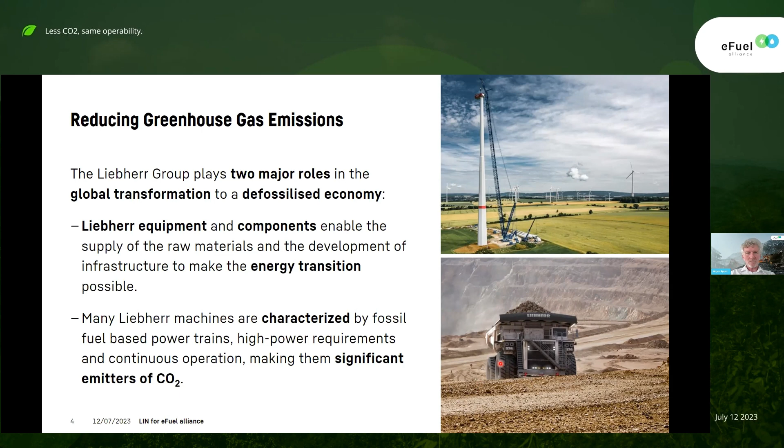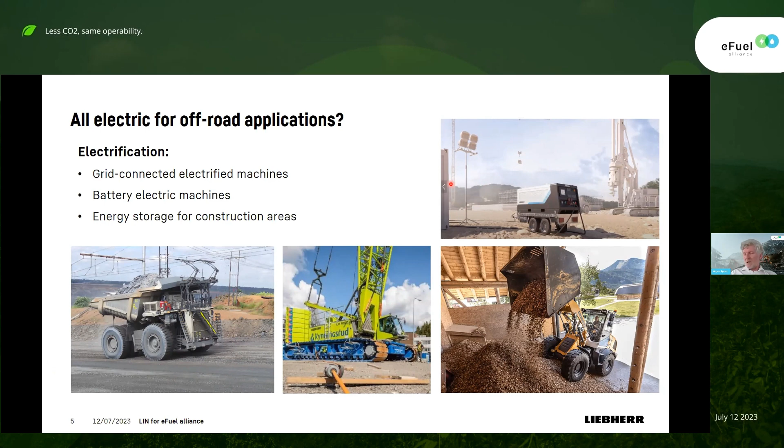And the motto today is all electric for off-road applications. So talking about electrification, it could be grid-connected machines like this lattice boom crane. We're talking about battery electric machines, this small wheel loader down here, grid connection plus battery, like this big trolley truck over here, or for instance, some kind of energy storage for construction areas. All this exists already. So is electric for off-road applications possible and thinkable? Yes, it is, and it is available already now.

What do we see? Strong trends towards zero emission job sites. So tailpipe emissions should be zero. That's a clear trend. We know this from urban areas, not only in Europe, driven from a lot of countries, not only Scandinavia, but also Dutch cities strongly recommend not having any tailpipe emissions. And this is, of course, a big headache because this reduces the amount of possible technical solutions.

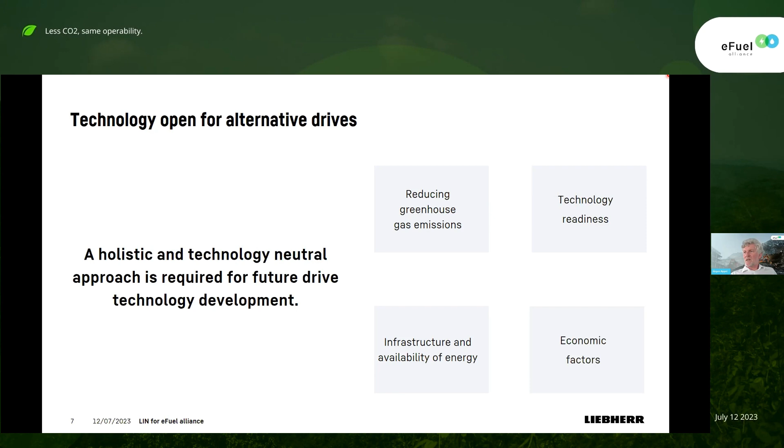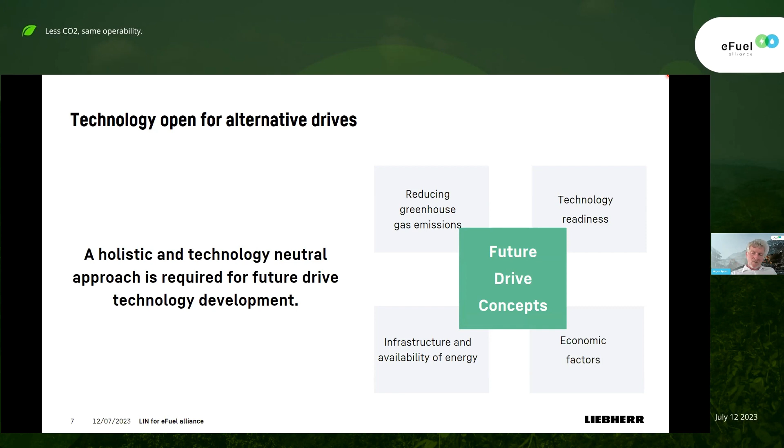And the last one is, of course, an economic factor. The customers do not make their business by having fun, but they want to earn money, and at least the overall technologies that we are bringing into the market must have at least the possibility for our customers to earn money with this. And if all these four factors come together, then we say that this is maybe a future drive concept. And I will go quickly through all these four pillars.

Reducing greenhouse gas emissions, Theresa Steinfort will talk to you later, is the first pillar, which means we have done this study to evaluate, really from a life cycle perspective, which drive lines for certain kinds of equipment have at the end, from cradle to grave, the lowest emissions. This is done by the study. I will not explain this later because this will be done by Theresa.

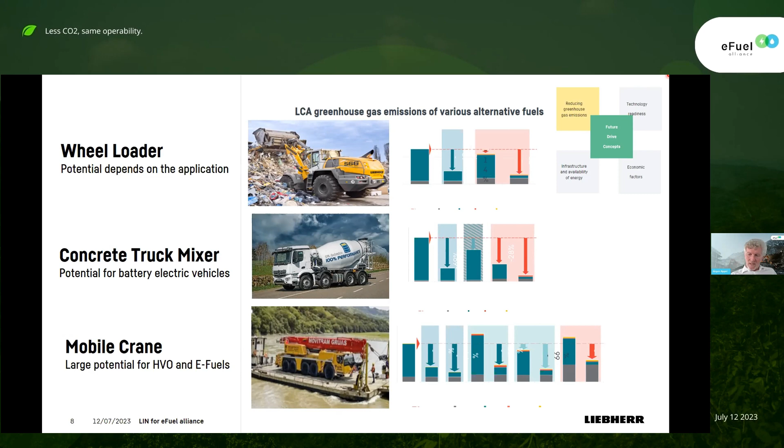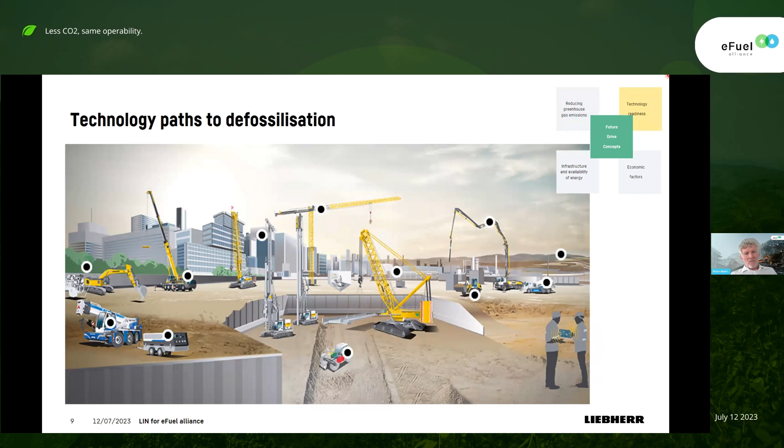We're talking about technology readiness level, second pillar. There are different paths for defossilization. You see it, of course, for all powertrains, increased efficiency is one big part. These local zero emission solutions will be in the market, having a larger share, we're pretty sure: battery electric vehicles, fuel cell, grid connected. Then there are maybe these temporary local zero emissions where you said it will not work to have everything zero emission tailpipe.

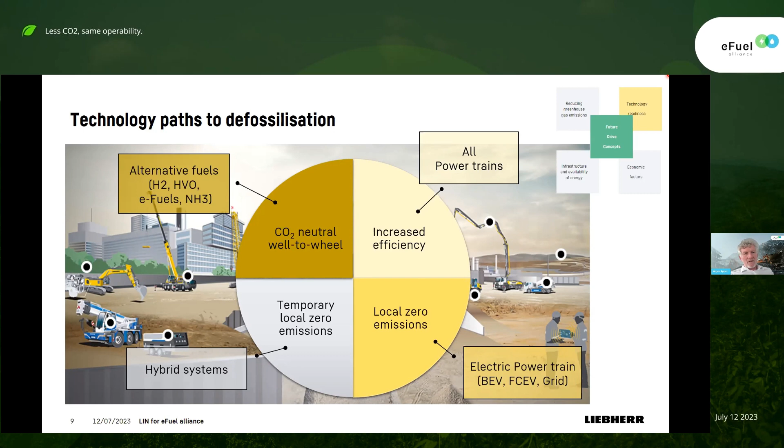So there we're talking about hybrid systems, a combination of different kinds of technologies, and we're talking about really CO2 neutral well to wheel, or maybe even later cradle to grave. Then we're talking about alternative fuels like eFuels or hydrogen or maybe ammonia, something like this. Is everything prepared to be sold to the customer to create benefit? There is clearly a yes and no.

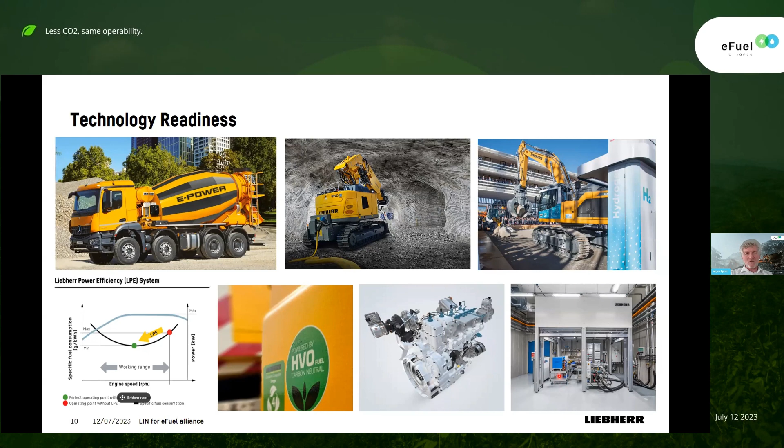Infrastructure and availability of energy. When we're talking about eFuels, that would be nice to have, of course, because the technology challenge for our engineering departments is the lowest. Unfortunately, you know that better than me, or as well as me, the amount of eFuel is not available yet, and maybe will not be available within the next 5, 6, 7 years. How the situation is, we get the strong input from the eFuel Alliance team, so thank you for this.

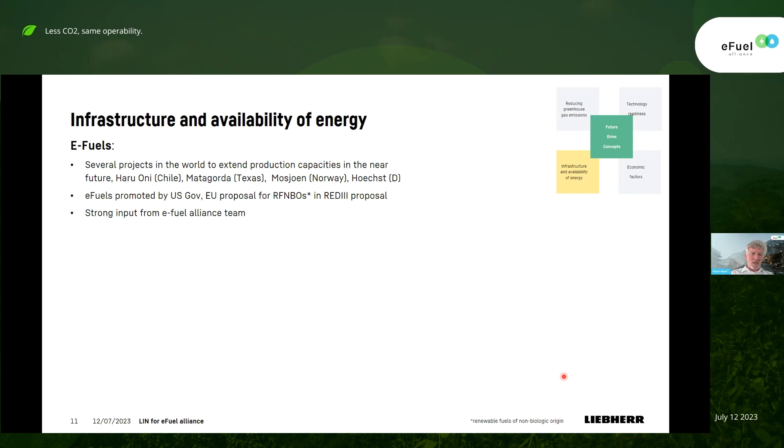We see that it will come, so it is a great hope and a big hope that this will really come, because it is one part of the solutions that we see, as it could reduce the greenhouse gas emissions over the whole lifetime quite tremendously. A picture here from Haru Oni. Hydrogen, we know green hydrogen is not available yet, but will come. That's growing slowly.

Hydrogen has, for the construction equipment, of course, one big challenge. Our machinery will not come to the fueling station, but the fueling station needs to come to our machine. And how to fill up tanks in a quite fast way is some kind of headache, some kind of homework that needs to be done with, of course, potential suppliers for us. I mean, this is a complete solution. It doesn't make any sense to sell a machine and then not have a concept for how to fill the machine later

on the job site. One thing is also clear: the operation range or the reach of these machines is limited. When we're talking about excavators running, for example, for 1 week, 5 days without refueling with fossil diesel, now with hydrogen it maybe needs to be refilled every day. When we are lucky and have done our homework; otherwise it's maybe only 6 hours, something like this. So this needs to be investigated.

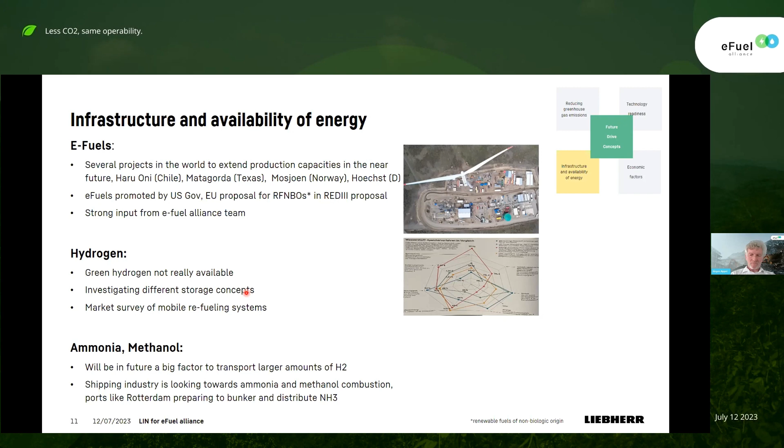And of course, you all know that it also depends where the production is and how to transport all the energy later on to Europe or the place where it needs to be. And this is being reviewed by Liebherr frequently, maybe not to change this, but to understand how our customers will think and what technical solution is feasible, as this is going to be the last pillar.

So what are the challenges we are facing? I mean, it's a good time for engineers, to be honest, because these are interesting issues. I like this really very much because it's going deep into the heart of the machinery, the drivetrains. So challenges: of course, the technology is challenging, storing these different molecules like ammonia or hydrogen, how to store it, how to handle this equipment. Combustion and exhaust after treatment for these kinds of materials is, of course, a big issue, a big topic.

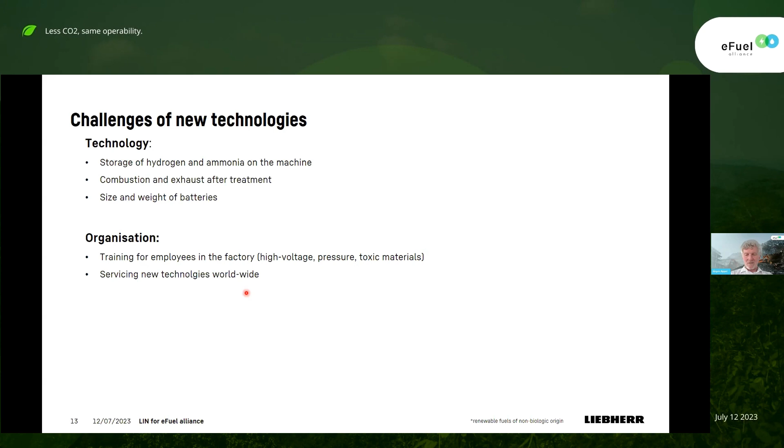And still, when we're talking about regulations, there is still an unclear roadmap for off-highway machinery. In the US, there is maybe a new standard coming from CARB in the late 20s, so still in this decade they are discussing.

Unfortunately, CARB, we have discussed with CARB, they are not friendly towards combustion technology in any kind. When we discussed, they said they see a clear trend towards complete electrification of the non-road machinery sector, which is not good for us. Nevertheless, it is as it is today.

European Union, we heard that maybe a new regulation will not come in this decade, maybe in 10 years, something like this. Hydrogen combustion could be an option, is not regulated yet. There is no clear definition of zero and low emission vehicles. This could be sorted out and could be done.

And of course, when you're looking at these portable emission measurement systems, in-service conformity for combustion engines is a clear trend, which gives us some headaches if you have only a small amount of machinery in the market. We're talking about 10 machines per year, and if you want to have then 60% of these PEMS, then it's going to be a critical situation for us. And so it creates a lot of costs. So all this is some part of the challenge.

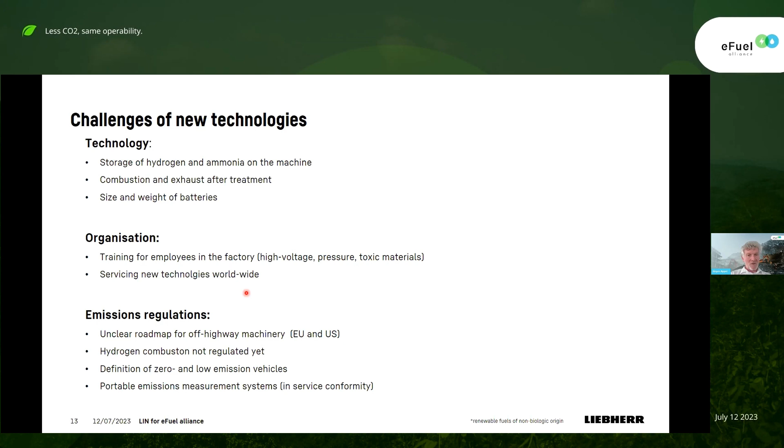Nevertheless, we are working on it, we have widespread departments of engineering all over Europe and US. We're working on these issues, and yeah, a challenging time, but it's fun to be part of the journey.

So, well, this is the end of my keynote. If you have any questions, feel free.

Yeah, thank you very much for this kickoff. I think very interesting insight and overview on the challenges you have. Of course, what you also can see here very clearly, it's a very diverse portfolio we are talking about, very different applications. And I think this is something we will see also from the presentations later on. And of course, we will have some fuel producers, which could maybe answer the question you raised, when are the fuels actually available? Let's see how this will play out later on.

So I have no questions in the chat right now. My suggestion would be we go on with the study now, because I think that is also a very interesting part to trigger more questions and to get more input on the different pathways. And I personally for sure have also some more questions for you later on. So far, thank you very much, Jürgen, for your presentation.

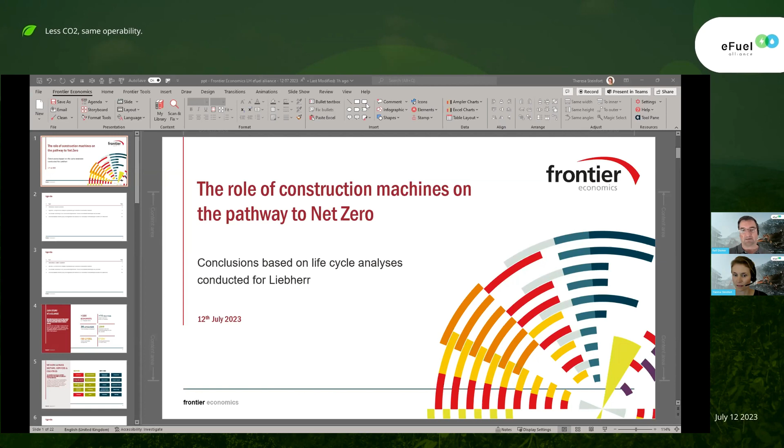Thank you very much. I hope everyone can hear me, and I will also try to share my screen. Perfect. Do you see? Presentation mode, and then that's it. Wonderful. Okay. Great. So thank you very much.

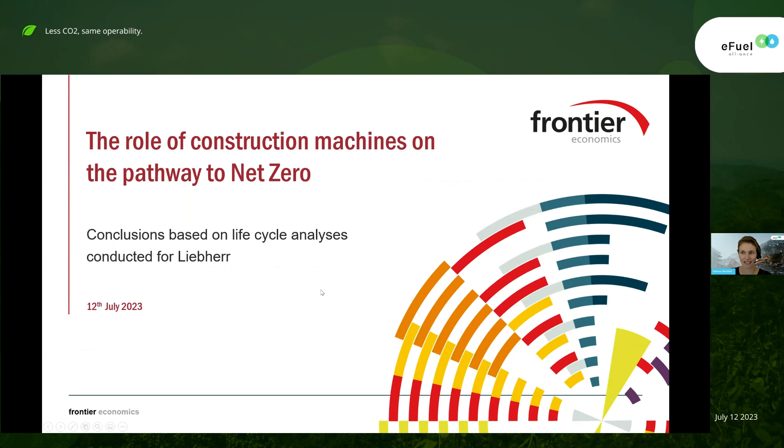Ralf, you already mentioned Frontier Economics, so I'll keep that very short. For those of you who haven't heard of us, we are one of the largest economic consultancies in Europe with more than 300 economists in 7 European offices. We work with a wide range of clients from the private sector, but also governments, regulators, other public authorities, and in a wide range of sectors. In Germany, we focus on the competition sector and also the energy sector and all sectors that are energy consuming, so automotive, transport, but also the heating or industry sectors.

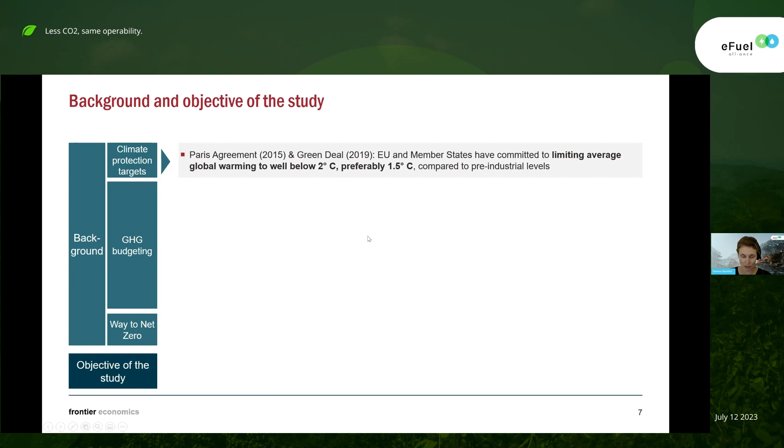Now on the background and objective of the study. With the Paris Agreement and the Green Deal, the European Union and the member states have committed to limiting global warming to preferably 1.5 degrees Celsius compared to pre-industrial levels. And if we think about what we need to do that, we need to think about the nature of greenhouse gas emissions. Wherever and whenever you emit greenhouse gas emissions worldwide, those accumulate in the atmosphere, and the more they accumulate, the more global warming increases. That means in order to achieve the target, we need to reduce greenhouse gas emissions.

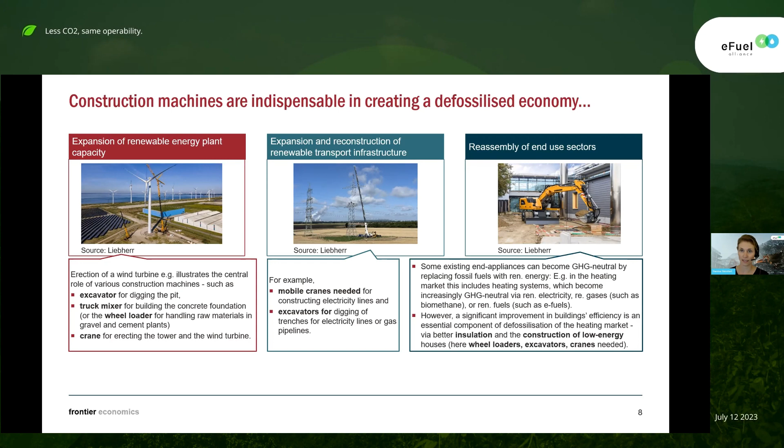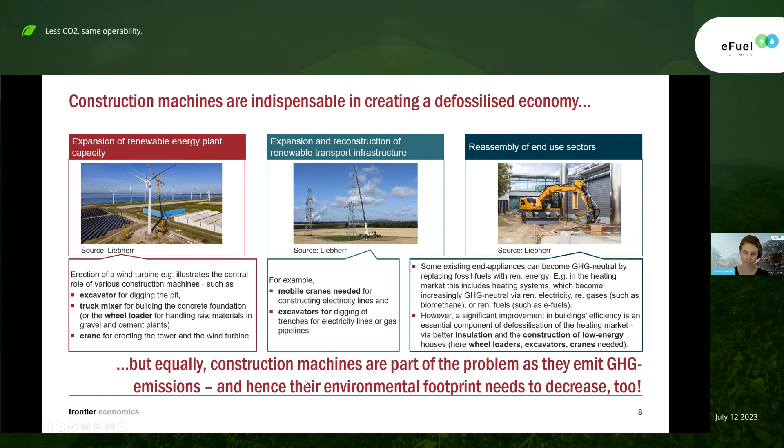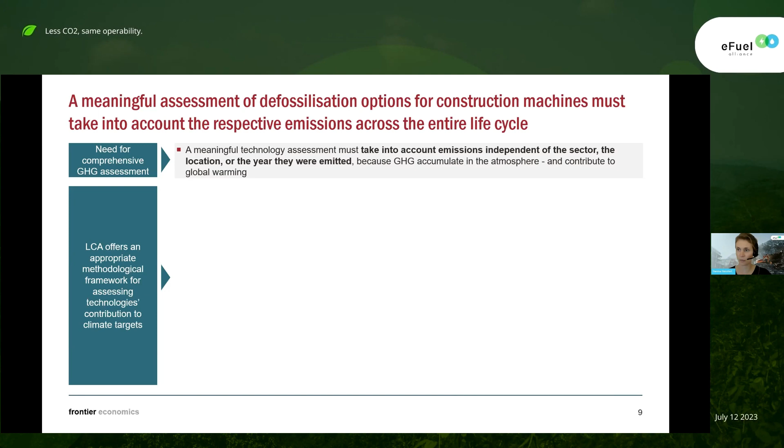But while construction machines are quite obviously indispensable, they themselves are also emitters of greenhouse gases, and therefore they are also part of the problem and need to think about how to decrease their carbon footprint as well. In doing so, it is really important that technologies are identified and also assessed based on the emissions they emit over their whole life cycle. That means independent of whether emissions are emitted in Germany or in a different country, whether the emissions belong to that sector or a different sector, and also which year they are emitted. They all accumulate in the atmosphere. So it's important to count all of them.

And the so-called lifecycle analysis does exactly that and accounts for all of these emissions, takes a comprehensive perspective, and therefore combines all of the life cycle stages. And in the mobile appliances, these are often the 5 that are illustrated here. Firstly, the construction of the machine or the vehicle itself. Then secondly, the energy sourcing, so producing the energy that is used later on, well to tank, then the infrastructure to transport the energy to wherever it's needed, and then the usage part or the tank to wheel part, and then end of life or recycling phase.

And therefore the life cycle analysis offers an appropriate methodological framework for assessing technologies because it's all encompassing. And this is quite different to some regulations, where sometimes regulations only focus on one particular sector or one particular year or one particular country, or sometimes all combined, which is quite in contrast to the nature of greenhouse gas emissions, which are affecting the climate warming globally.

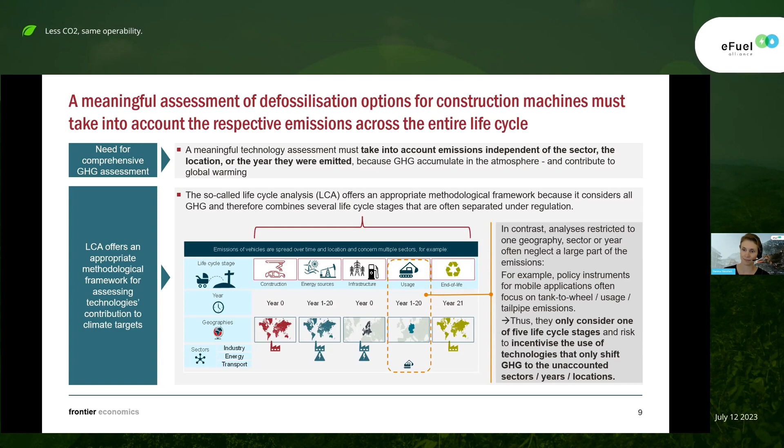But life cycle analyses look at all of it quite comprehensively, and that is what we also did in this study. Particularly, we looked at 3 different technologies: mobile cranes, truck concrete mixers, and wheel loaders. We looked at them from cradle to grave, so looking at the 5 stages I just explained. And for each of the technologies, we looked first at the life cycle analysis of the current technological setup, which is usually a combustion engine using diesel fuel, and then also at various potential defossilization alternatives, which use a different alternative energy source and sometimes a different drivetrain as well.

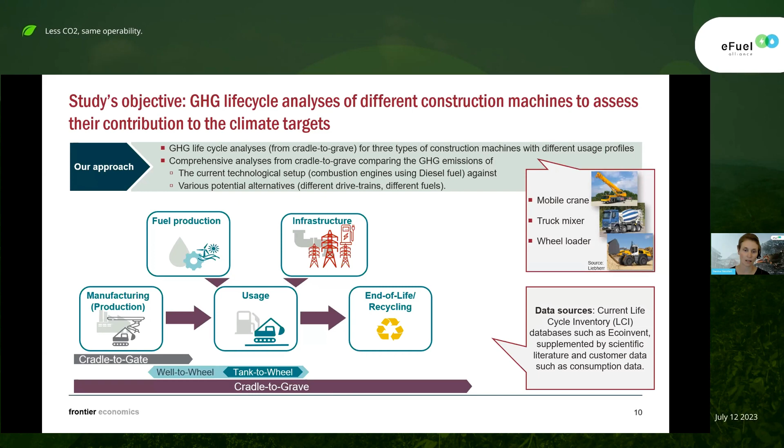If we go immediately into what the life cycle analysis results show us, we dive into the mobile crane. For time reasons, I quickly go over that page. One more important thing is the data sources we used. So we used the life cycle inventory database ecoinvent, which is a worldwide database for, among others, CO2 emissions. We supplemented that with scientific literature and also Liebherr data that they provided us, for example, on the consumption of the different construction machines.

For the mobile crane, there are some general conditions. Its life lasts approximately 25 years. And we have the annual operation data. And overall, the performance requirements of the mobile crane are quite high. So the energy it needs at a particular point in time is really high, and yeah, it's just an energy-intensive high performance requirement. That's the major thing that's important here.

And the technologies we looked at are, as I said, firstly the status quo technology, but also different alternatives within the combustion engine area. We looked at a mobile crane that is run by eFuels, another one that's run by HVO, and also one that is run by a hydrogen combustion engine and uses green hydrogen, and just for comparison, also gray hydrogen. Also, we looked at a fuel cell electric mobile crane, again run by either green hydrogen or gray hydrogen, and also a purely battery electric mobile crane running on green electricity or the current electricity mix.

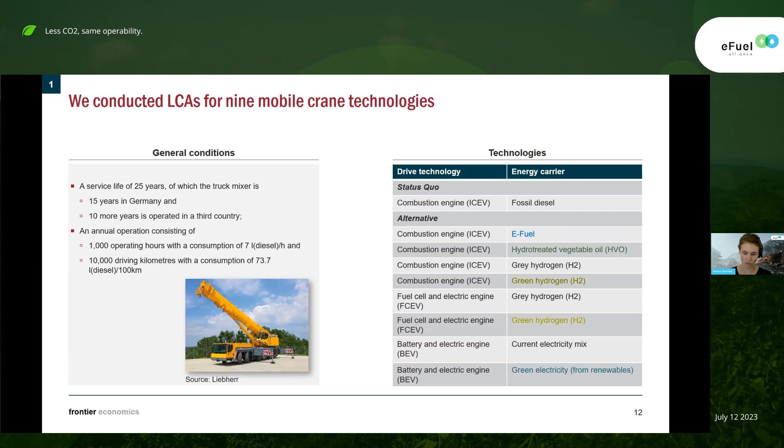A note maybe on that part. In this study, we focused purely on the CO2 emissions and the life cycle analysis. We didn't assess the technical feasibility. And talking to the Liebherr staff, it sounded like really a stretch to deliver these tasks with a battery electric vehicle, just because there's so much energy required at a certain point in time, and transporting that much energy means transporting a huge battery, which is really heavy, actually too heavy to be transported on the chassis of the mobile crane. So some real technical difficulties. Nevertheless, we assessed that in this analysis, just for your information as a side remark.

And this is what the results show. So on the left-hand side, you see the CO2 emissions of the current mobile crane. So it's a bit more than 1,300 tons of CO2 equivalents over its life cycle. And then you see all the different options here. And you see that for that crane, eFuels and HVO, so the liquid alternatives, have the greatest defossilization potential. They reduce exactly the well-to-wheel emissions, which are the largest driver of emissions in the status quo. So they manage to reduce that while making use of the already quite low production emissions that we already have in the status quo. So they don't increase that. So those two options are actually the best ones. HVO is in the short run the best option. It's the one that reduces the emissions most.

However, in the long term, the potential is rather limited. So in the long run, increasingly eFuels would need to be blended in. And it's really nice to hear that Liebherr has already started using HVO at their gates for test trials, etc., immediately after our study.

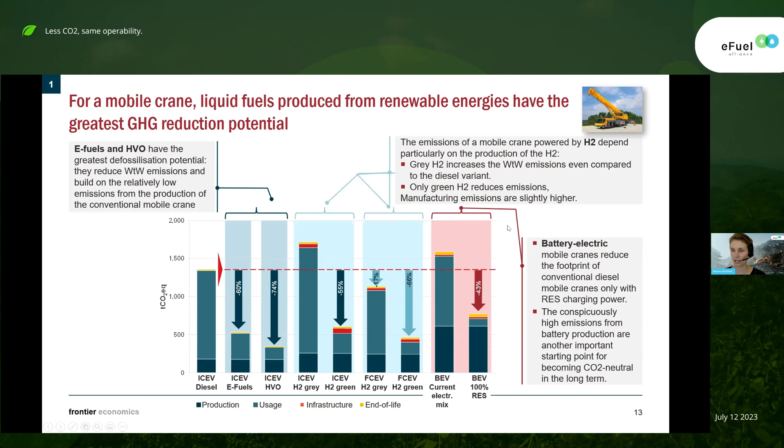It's almost 3 megawatt hours, so almost 3,000 kilowatt hours, which is huge if you compare it to the usual vehicle batteries, like 60 kilowatt hours or something like that. So these are the results for the mobile crane. Looking at the time, I will just quickly jump over the other two results.

For the truck mixer, we looked beside the status quo option at one that uses eFuels again. Then we looked at a mild hybrid truck mixer. There, the difference is that the mixing part is driven by a battery electric engine, but the chassis is still driven by diesel.

And we also looked at a purely battery electric truck mixer, again, one with completely renewable electricity and one with the current electricity mix. And here we see that using the battery electric drivetrain actually is quite sensible from a climate perspective, because that achieves the largest greenhouse gas savings, up to 86%. Of course, this is only true if the electricity mix is completely renewable.

But the logic behind that is that the profile is quite constant, because the mixing goes on all the time, and you don't have a huge energy need at a certain peak point in time. And also you can use recuperation energy and fill up the battery, and therefore increase the overall efficiency of this construction machine.

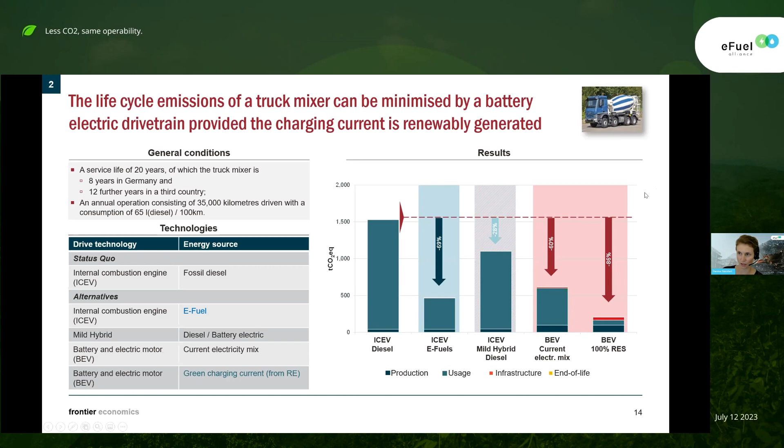Then going on to the earth-moving machine, the wheel loader. We looked at a rather small model where, again, we compared the current technological setup using diesel to one that uses eFuels, and also one that uses electricity, with the different electricity mixes. And here it really depends. For the model we looked at, the battery electric version saves most emissions, if we look at a completely renewable electricity mix.

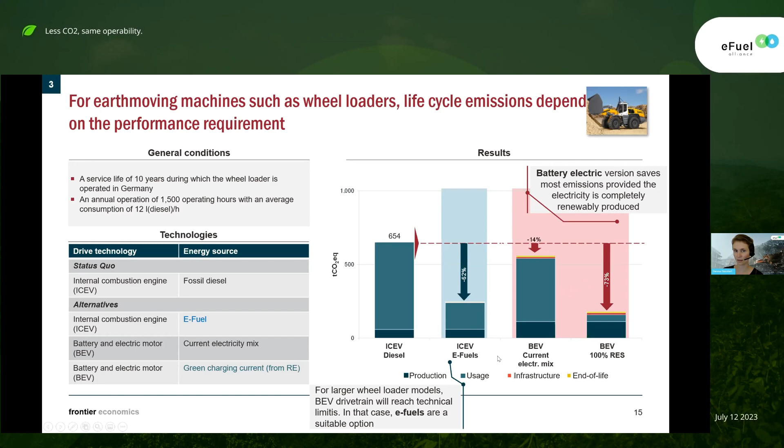However, talking to the Liebherr team, they said for the larger models, it's more difficult to find a technically feasible solution to use the battery electric drivetrain. So in that case, the eFuels are also a feasible and sensible option. So overall, the life cycle analysis shows that depending on the specific requirements of the construction machines, different technologies are best to reduce the greenhouse gases.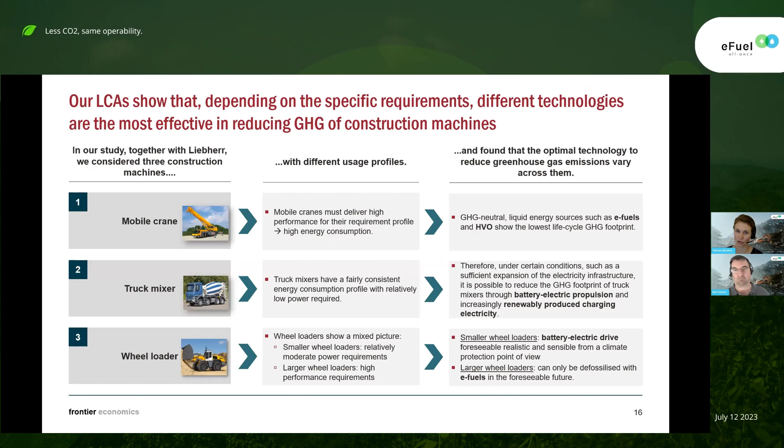And maybe just as the last talking point, the recommendation for action that we suggest is that in general, climate policy needs to consider and incentivize the greenhouse gas saving and contribution of all technologies across their whole life cycles. So firstly, life cycle analysis should be the base for deciding which technologies are used, because all greenhouse gas emissions should be taken into account.

And only with such a comprehensive view can climate-friendly decisions actually be made, and thereby it can be prevented that emissions are just shifted towards other sectors that regulations don't look at. And also the life cycle analysis showed that effective climate protection, particularly in construction machinery, must allow for technological diversity, because there isn't one silver bullet, but depending on the requirements, we need different solutions.

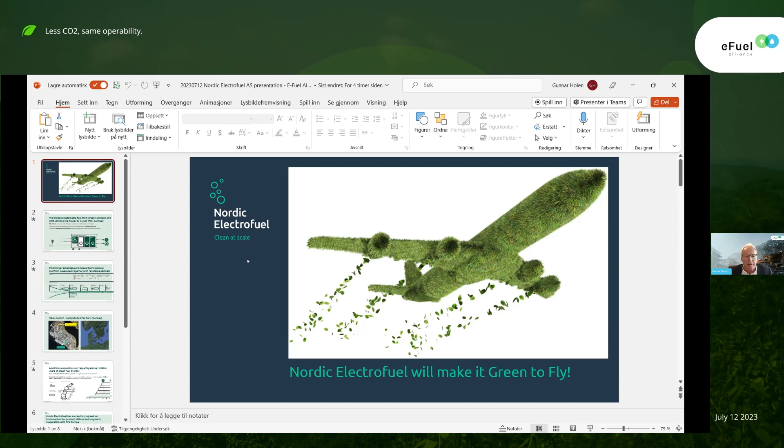And obviously using e-fuels, it's fully compatible with the current infrastructure and enables a long lifetime. And we've seen from Frontier Economics that the impact of using e-fuel is as large and maybe even larger than using battery electrics.

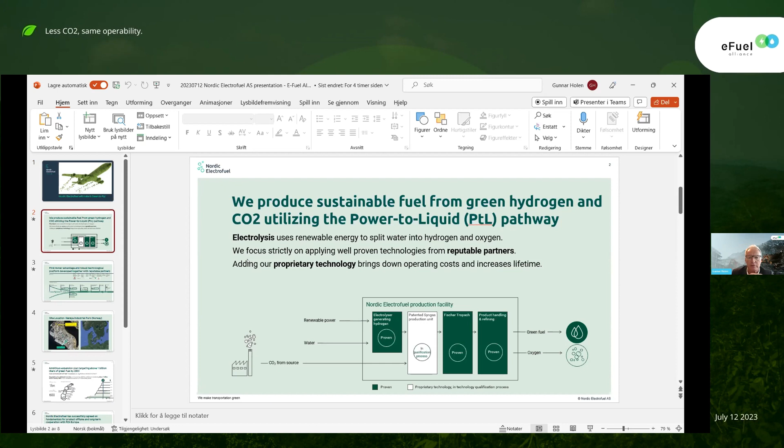Going into our process, I think in this forum it's pretty clear how e-fuel is produced. So we do the traditional hydrogen process. We take CO2 from a point source, we put that into the syngas reactor, and we take this into Fischer-Tropsch, and we have the green fuel, which can be used in the different applications. Our CO2 is taken from a point source. We would also utilize the oxygen, and we even have some steam. So we're basically a circular economy.

I have this slide to show that we've actually been around for quite some time, and we really made use of this time. We started as a pioneer in the e-fuel business; we early on saw the potential in this market. At that time, going back to 2015, e-fuel was viewed as too expensive, but we're working on getting our product affordable, and we've been doing feasibility studies, concept studies. We teamed up with the Technical University in Norway to do concept simulations. We've done the front-end engineering and design. We've done the FEL3, and we've also done some post-optimization now.

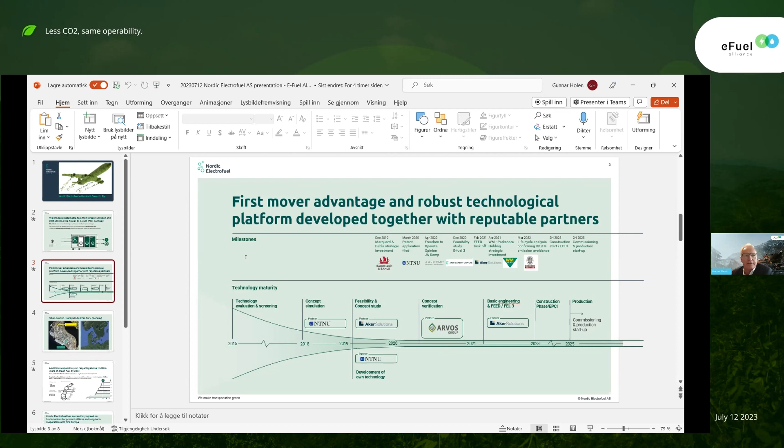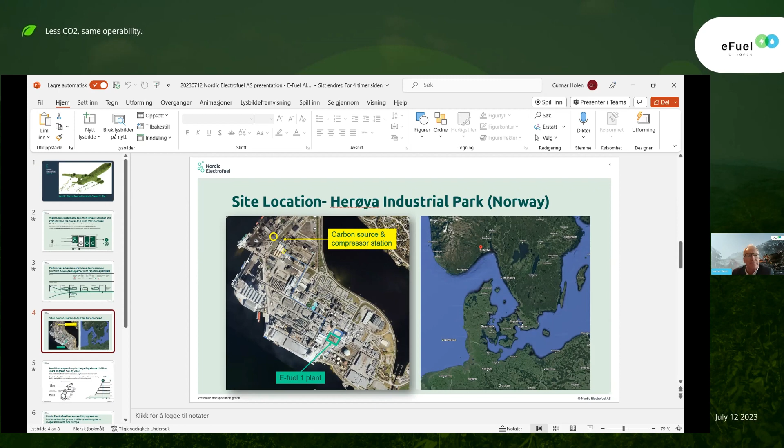And we're basically ready to start construction, given financing, and we're doing quite well on that point, but definitely open for investment if anyone would be interested. You can see here our locations. So we're quite close to Europe. Our plant is about 160 kilometers out of our capital, Oslo, with close connections to Europe. You can also see the site we have. That's our industrial park. It's the biggest industrial park in Norway, and we have all the infrastructure in place, enabling us to be quite cost efficient, reducing capex quite substantially through that.

We will start with a 10 million liter facility. We have sites where we are in close discussions with the stakeholders on putting up additional e-fuel plants, and we actually have an ambition of producing 1 billion liters only a decade from now. And we start with 10 million liters. The next phase will be to have plants of 200 million liters, 160,000 tons of capacity.

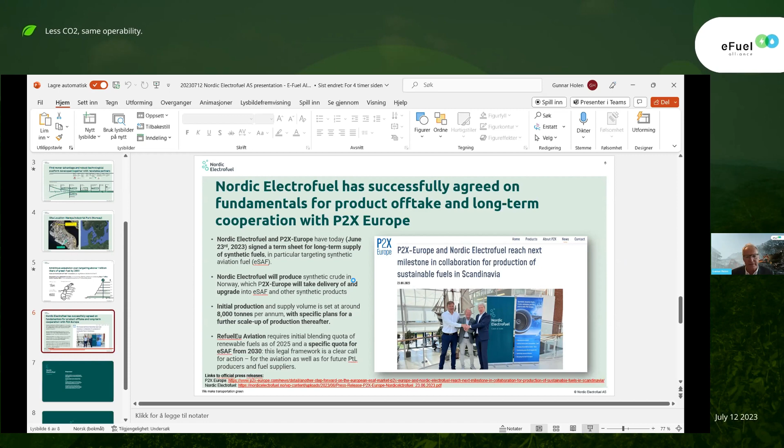Sorry to interrupt, but could you please start the presentation mode so everyone can see the slides a little bit better? Okay, sorry about that. I thought you had that. Is this okay? Yeah.

I would just like to say that we just signed an agreement with P2X Europe for offtake for all production of our first plant. That plant is supposed to be ready for production in 2026. That will have an initial production of 8,000 tons per annum. And as I lined up, we will scale up following that, aiming to add 33,000 tons a year after, and also then to have 800,000 tons within a decade from now.

So going through this, we definitely see that we can be a substantial supplier to this off-road segment, a segment where it would be, I think, very needed to have e-fuels, where it's difficult to get charging out to the different locations when these vehicles and machineries are working, and obviously using e-fuels would allow those machineries to work 24/7, which, for instance, in the mining sector is the norm

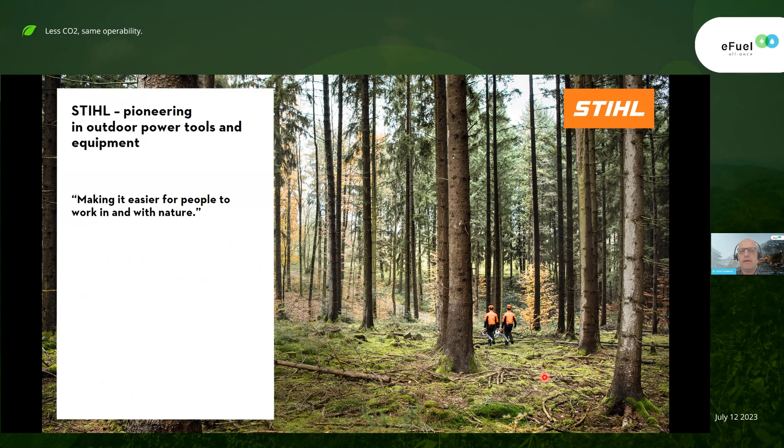Ladies and gentlemen, Ralph just mentioned we are a company who's almost 100 years old. And about 97 years ago, our founder Andreas Stihl had a vision of making it easier for people to work in and with nature. So that was the driving factor to develop the machinery we know today, and that was developed in the past 97 years.

And I want to use this opportunity to introduce a little bit more of our company, because as Ralph also mentioned, we are very well known for our chainsaws, but we also do a lot more. Our products are used not only in the forestry business or agriculture business, but also for garden and landscape maintenance, in construction work, and also in private gardens.

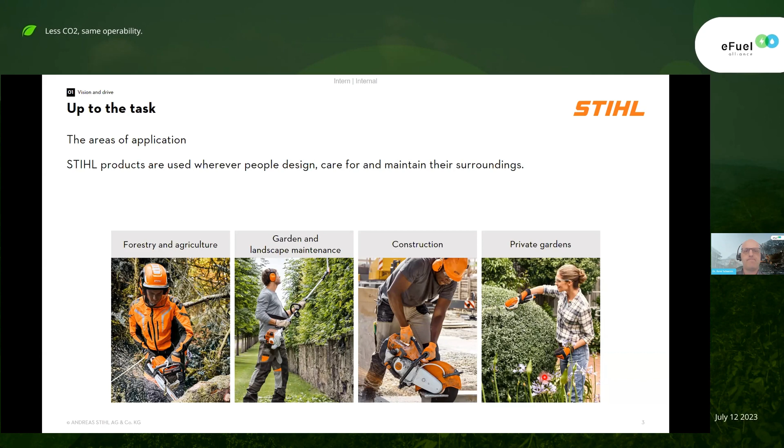Stihl has developed in the past decades very rapidly. In 2022, we had over 20,000 employees worldwide. I've mentioned our production sites all over the globe. We had a turnover of more than 5 billion euro. And one specialty of Stihl is we have more than 55,000 specialist dealers globally. So normally you buy our equipment directly from our dealers, so they can support every question you have and introduce you to our machinery.

As mentioned, we are not only producing chainsaws, we also produce very different machinery to landscape and to take care of your garden and everything else. And we also offer protective equipment, but also our operating fluids. That's what I'm concerned with. We directly supply our customers with fuels and lubricants.

And we offer different kinds of technologies. In the past, it was purely gasoline and a little bit of electric equipment. And for the past about 15 years, the trend towards battery has also taken hold of Stihl. We are amidst this transformation, there's a strong tendency to go towards battery-driven equipment. But as we've seen before with Liebherr, it strongly depends on the applications, where it is possible and where it might not be so easy

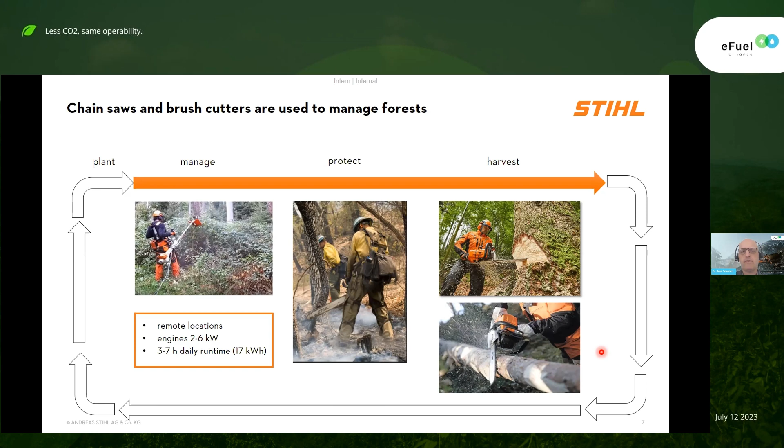So if you compare the different possible technologies, what energy you need and what battery weight you have for one complete day, you see that for chainsaws or backpack blowers or cut-off machines for construction work, you are at a level that might be possible, but I don't see many of our forestry workers carry around battery packs in this range of weight. On the other hand, the fuel weight you need for this whole day is in a typical range of, let's say, two 5-liter canisters, or even only one that you carry around, and you can work the whole day.

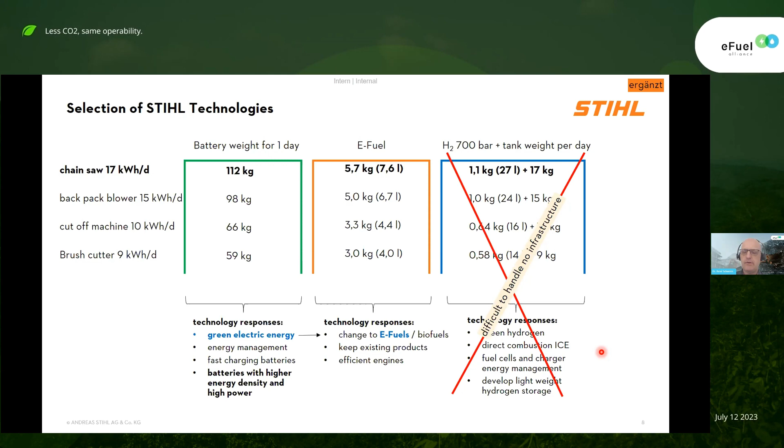Another thing we took a look at is hydrogen, but in handheld equipment, this just cannot be handled, and there's also no infrastructure for that. So our solution will be to still use internal combustion engines. You could also find solutions with a remote charging infrastructure, as shown here on the left-hand side. We're also looking into that. But still, it's a lot of investment, and there's a lot of hassle.

So on the other hand, if you use existing equipment that you already have and just change the fuel, that might be the best solution, because you don't have to change much infrastructure. You just have to find suitable sources for the fuel that we offer to our customers. We will see a continued trend of battery electric systems also in handheld equipment, but we will also remain in certain applications, especially in professional surroundings in remote locations, where we are convinced that synthetic fuels will play a large role in the future.

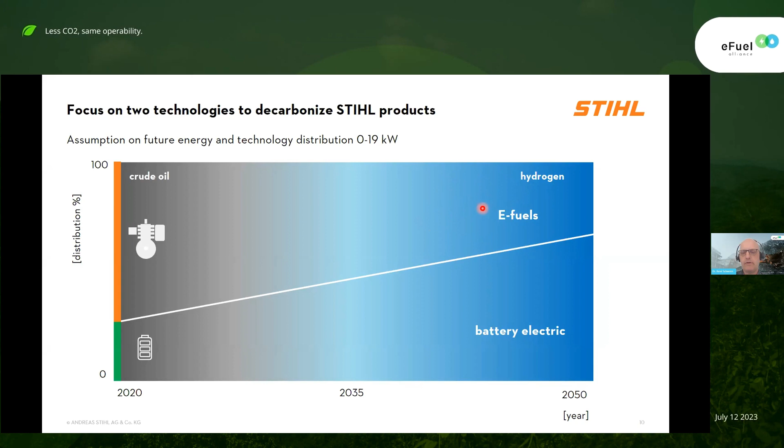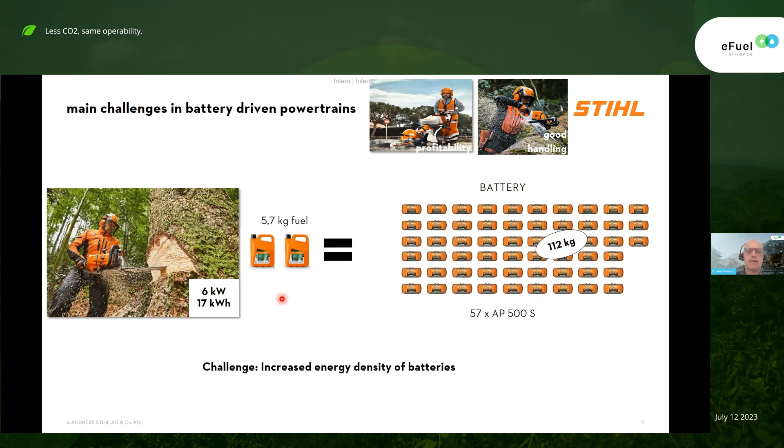So last year, we were able to offer our customers a not 100% fossil-based specialty fuel. In our equipment, we recommend to always use an alkylate fuel. It has many advantages. So we were also able last year to offer the first step into this new future of synthetic fuels. In this case, it's a product with 10% of bio-based material.

We will increase that volume in the future. We see the bio-based material as a bridge towards the future and the eFuels that will hopefully be available. We are working on that together with the fuel producers and other stakeholders to find solutions to produce even alkylate fuel from synthetic methods in the future.

But in the meantime, we see biofuels as a viable option because our volumes are not as high as in other fields of application. For example, I mentioned the 17 kilowatt hours per day, compared to the 100,000 that one of the large trucks of Liebherr is consuming. So our volumes are much lower, and the bio-based products are a viable bridge towards the future.

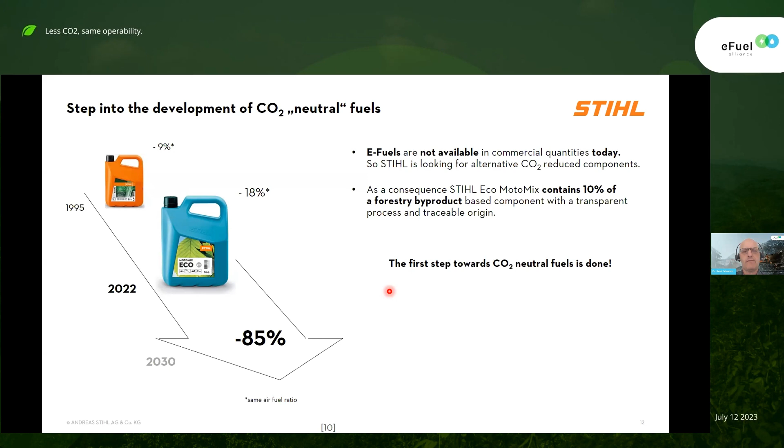So I hope that I could give you some insight into what we are doing, and I'm very happy to answer any questions that you have later on. Thank you. Thank you very much, René.

Maybe just one question to understand this a little bit more in detail. So is it the usual business that you are also providing the fuel for your customers, or is that even mandatory? So you tell them for quality reasons or for warranty reasons, whatever? Well, we can only recommend to use this special alkylate fuel. In some areas of application, it is mandatory.

For example, in certain forestry applications, if you are working in a public forestry business, you have to use this kind of fuel, and it's always a good idea to use this kind of fuel. It is more expensive, so our customers already pay a premium for this kind of fuel.

But it has many advantages, especially for your own health, because the fumes that you're always exposed to when you work with handheld equipment are much less harmful compared to the regular pump station fuel, which obviously contains high amounts of aromatics. So there's a big advantage if you use this kind of fuel.

Our dealerships offer this kind of fuel in certain regions, mainly in Western Europe, North America, Australia, New Zealand. In other maybe less developed and less rich countries, this kind of fuel is unfortunately not yet available, but we hope in the future this market will grow because it has many advantages.

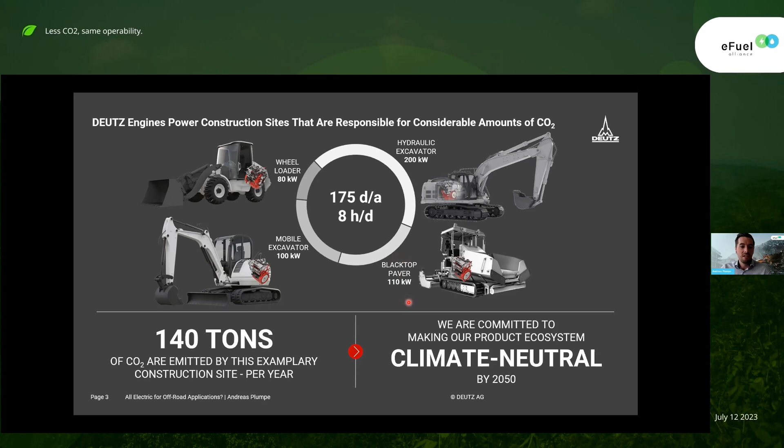And considering that Deutz sells more than 150,000 diesel engines per year, we can see that the potential for reducing our Scope 3 emissions here is huge. And we want to make use of this potential. And that is why we are committed to making our product ecosystem climate neutral by 2050.

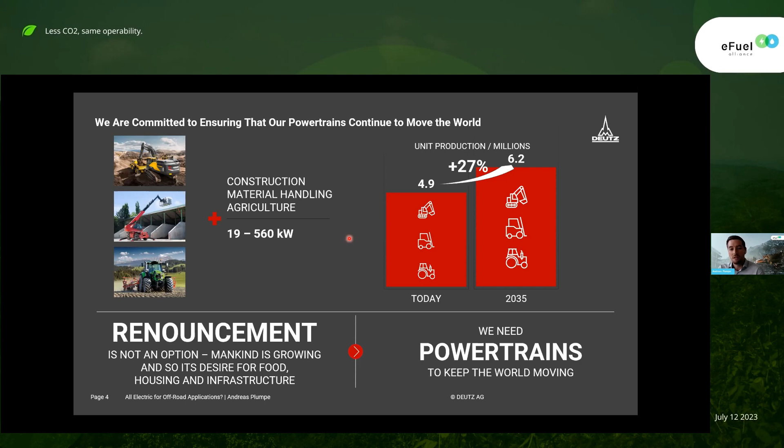And on the other hand, we see growing demand for those powertrains. When we look at the applications that I just mentioned and the main segments, construction, material handling, and agriculture, in a power range between 19 and 560 kW, we see that in the next 12, 13 years, an increase in demand will happen by almost 30% of these applications. And that is because mankind is growing and the desire for prosperity in mankind is growing, and all that needs to be covered with housing, with food and infrastructure. So we need powertrains to keep the world moving, and renouncement is no option.

And the question is, how can we solve this problem, and how can we do this transformation? In order to do that, we have to define a solution space. And for that, a deep, profound understanding of the energy system and therefore energy carriers is necessary. And what we see here is the world's final energy consumption in 2021 on the left-hand side. And for simplification, we divided the energy consumption in two variables, let's say, molecules on the one hand and electrons on the other hand. And we see that in today's energy economy, electrons only contribute 20%, and the dominant amount is provided by fossil molecules. This is more than 2/3 here in these 2021 numbers.

So on the right-hand side, we see a scenario conducted by the IEA. It's an APS scenario, announced pledges scenario, which takes into account all measures that are announced by governments to mitigate climate change. And for instance, what is included here is the German ambition to become climate neutral by 2045. And in this scenario, we see, and that is a good message, that electricity doubles between 2021 and 2050. So from 20 to almost 40% of the whole energy consumption. That is a good message.

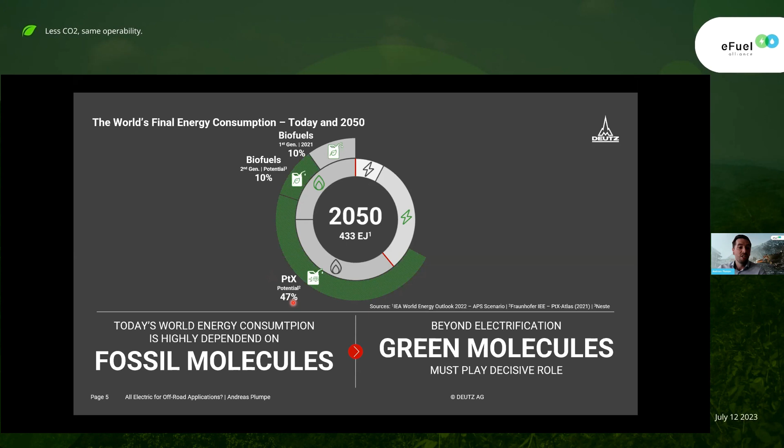But as we all know, due to limited feedstock, these capacities are limited, and that is why PTX or eFuel products must play a decisive role here. And what we see here, this 47% of the final energy consumption is almost half of the energy consumption in 2050, and that is not a physical potential, but rather a potential that takes into account geopolitical stability of governments and socio-economic factors. So we really talk about what is feasible, not only technically but also economically, and that is a huge amount. So we need to harvest these almost 50%.

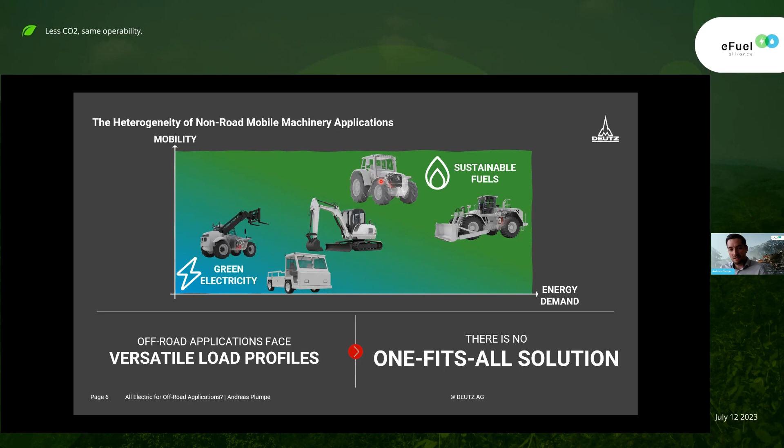But on the other hand, there's heavy duty equipment like big wheel loaders, dumpers, tractors, or, as I think Mrs. Steinfort already mentioned, this mobile crane. They have huge energy demands, and the sizes of the batteries would just not be suitable for these applications, apart from those machinery being operated in areas that are very rural and not having access to energy infrastructure. So the applications are very versatile in terms of load profiles, and that is why there is no one-fits-all solution for non-road mobile machinery.

I want to come back to the initial question of this event: all electric for off-road applications. I can put this very well into the narrative of this event, that it is not a question of either or, but rather both. And we believe that there's more than just one road for a green off-highway mobility, and that is the DEUTZ strategy.

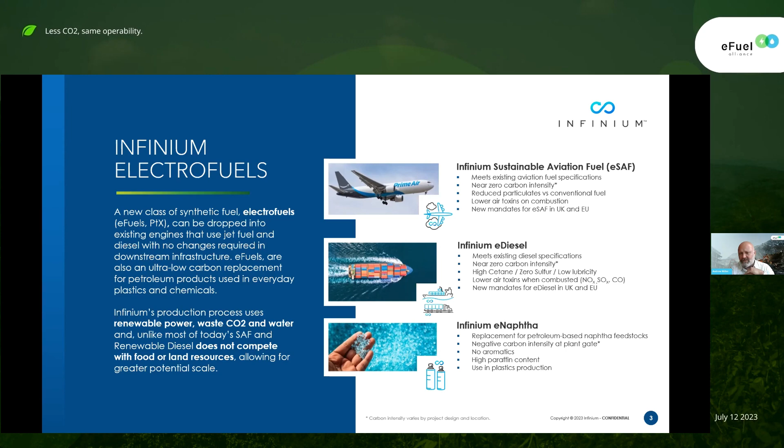E-fuels bring a number of other benefits as well. Synthetic fuels have benefits across particulate matter, nitrous oxide, NOx, and other emissions. There are benefits to local communities as well. I'll also note that synthetic fuels have tremendous stability properties. So for operations like data centers where that fuel might be sitting for some time, or in a distribution network where the lift might not be of significant volumes on a regular basis, those synthetic fuels do have tremendous benefits.

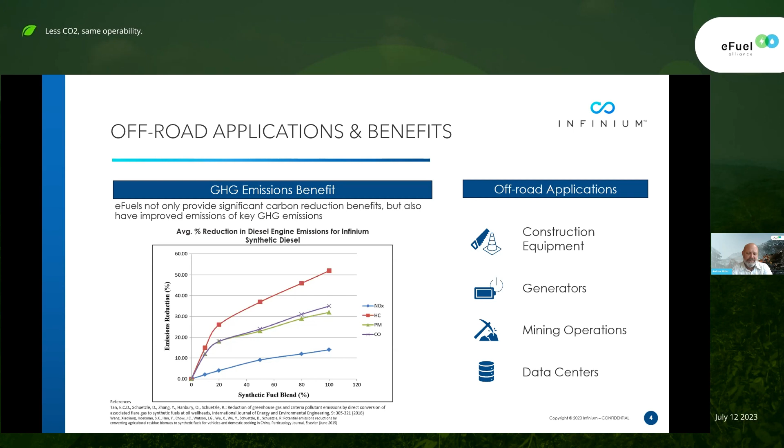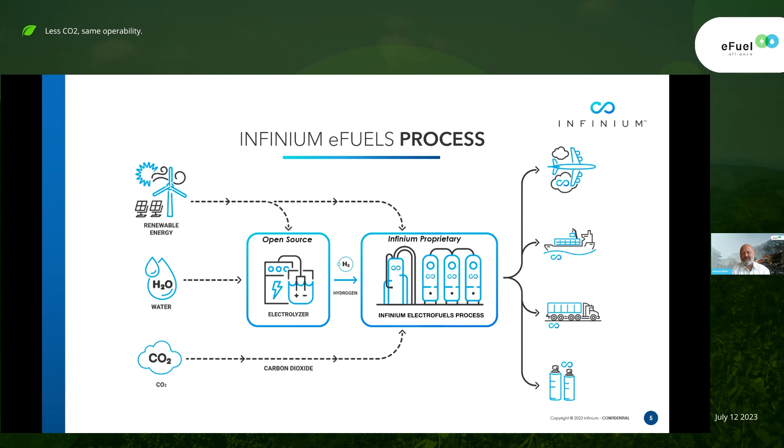We're technology neutral on the electrolyzer. We look at both the high pressure alkaline as well as the PEM, and are monitoring some of the solid oxide technologies that are emerging. We're very excited to see the supply chain for hydrogen grow. We think that there's tremendous opportunities for cost reductions in the electrolyzer space, and we'll continue to work with a number of different suppliers on that front.

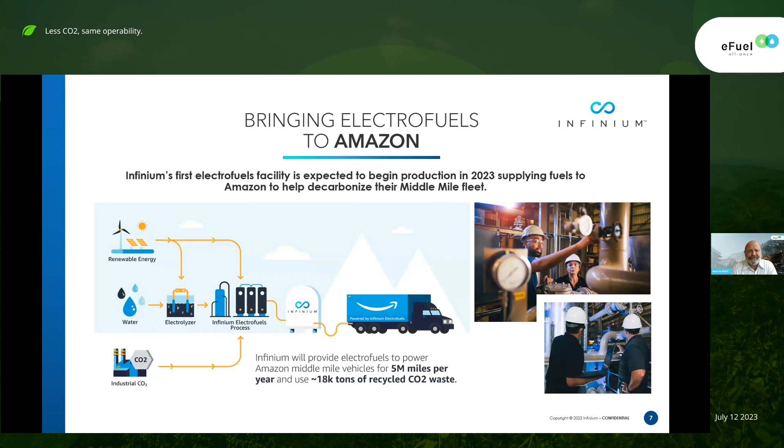I mentioned our Corpus Christi project in Texas. That's going to be producing fuels a little bit later this year. That will be producing e-diesel that will be going to Amazon for their middle mile fleet to help address their decarbonization goals. In addition to the Corpus Christi facility, we have another facility, what we call a Roadrunner facility, which is a brownfield conversion of a gas to liquids project. We're producing SAF, diesel, and naphtha at that facility.

And we have a number of what we call the large-scale projects in the public domain, the Reuze project in Dunkirk with ArcelorMittal and Engie. We've got projects underway in Scandinavia. And then just from a US perspective, I personally believe that the incentives and legislation that's been put in place in the US around green hydrogen, combined with the very active and robust renewable power markets, both from a wind and solar basis, created a tremendous nexus for eFuels. I think you will see eFuels being made in North America and being exported to the UK and EU. That's my presentation. Look forward to Q&A.

Thank you very much, Andrew. Very comprehensive. So it looks like when I take the 20,000 tons, for example, steel would need, you would be ready for that soon, right? Absolutely.